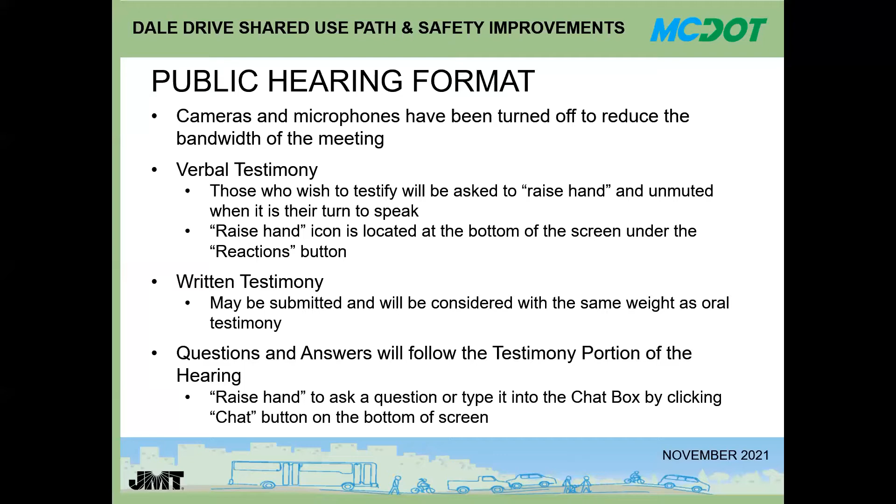Tonight's hearing is being held pursuant to Section 49-53 of the Montgomery County Code. The purpose of a public hearing is to obtain testimony regarding this project. Testimony received may influence the final design plans. Your comments should be focused entirely on the Dale Drive Shared Use Path and Safety Improvements Project, which is the topic of discussion. All interested persons are entitled to be heard at this hearing.

However, the testimony portion of this hearing is not a forum for dialogue, questions and answers, or cross-examination. Please direct your remarks to the Dale Drive Shared Use Path and Safety Improvements Project that is the subject of this hearing. If comments stray into areas not related to this project, I will ask that you refocus your comments to the subject project.

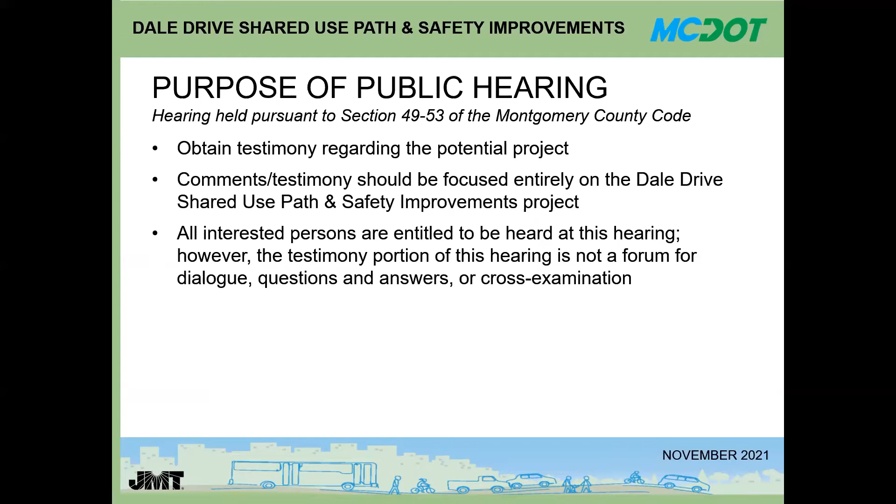Following the conclusion of this public hearing, the record will remain open for 2 weeks to allow any person who was unable to attend this hearing an opportunity to have their comments included in the public record and be fully considered. The official closing date by which all comments and testimony must be received is Wednesday, December 1, 2021 at 6:00 p.m. Submissions should be emailed to Angel Chang at angel.chang@montgomerycountymd.gov or provided via the online comment form on the project webpage. The comments must be received by the close of the hearing record.

After the hearing is concluded and the record is officially closed, I, as the hearing officer, will review and weigh all the information submitted into the public record and make a recommendation to the Director of the Department of Transportation, Mr. Christopher Conklin, for his final decision as to whether the project has been shown to be in the best public interest and whether or not to authorize the project as proposed or any portions thereof. And now, to discuss the shared use path proposal for Dale Drive, I give you Dan Sheridan.

Dan? Good evening, Mr. Paylor, ladies and gentlemen. For the record, I'm Dan Sheridan with Montgomery County Department of Transportation in the Division of Transportation Engineering, and I'm substituting in tonight for Tim Cupples, who is the Division Chief.

The subject of this evening's public hearing is to consider a proposal to construct an 8-foot wide shared use path with a minimum 5-foot wide grass buffer along the following roadways in Silver Spring: the north side of Dale Drive from Georgia Avenue to Colesville Road, and the south side of Dale Drive from Columbia Boulevard to Woodland Drive. For your convenience, we have posted a few downloadable displays that aid in the visual description of this project on the project website. We will review them as I describe the project.

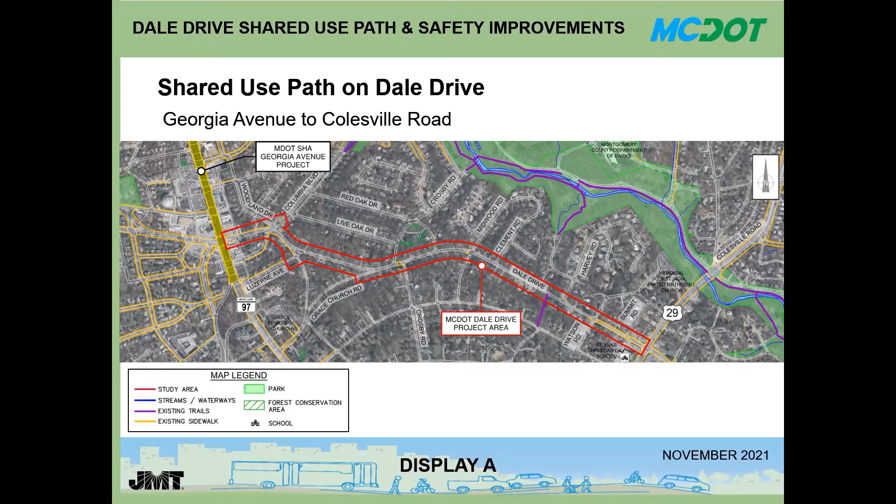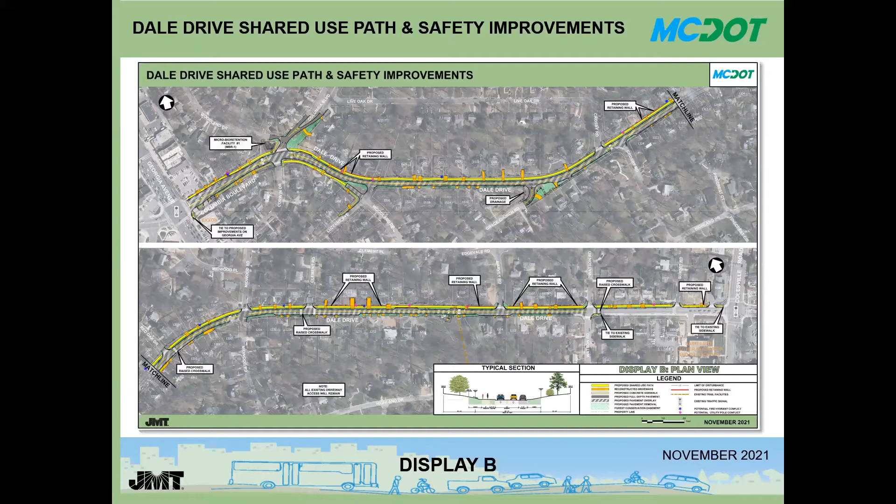Display B shows the improvements in more detail. The large plan shown on the screen can be downloaded for review. For tonight's virtual presentation, we will use zoomed in images of the plan as I highlight several of the key features. The next several slides will show the Dale Drive shared use path in more detail. Each of these slides includes a map in the upper left corner that shows what segment of the path we are discussing. In the upper right corner of the slide is the legend highlighting what the various colors and line styles are showing. The proposed shared use path is shown on the plan in yellow.

The dark black line around the path that says LOD represents the limits of disturbance. This is the area that is expected to be impacted during construction. The limit of disturbance includes the path, the grading, and the space needed to be able to construct. The orange line represents the portion of a driveway that is proposed to be reconstructed. The red line indicates the location of the proposed retaining wall. Finally, the green shaded areas represent the grass buffer and green spaces.

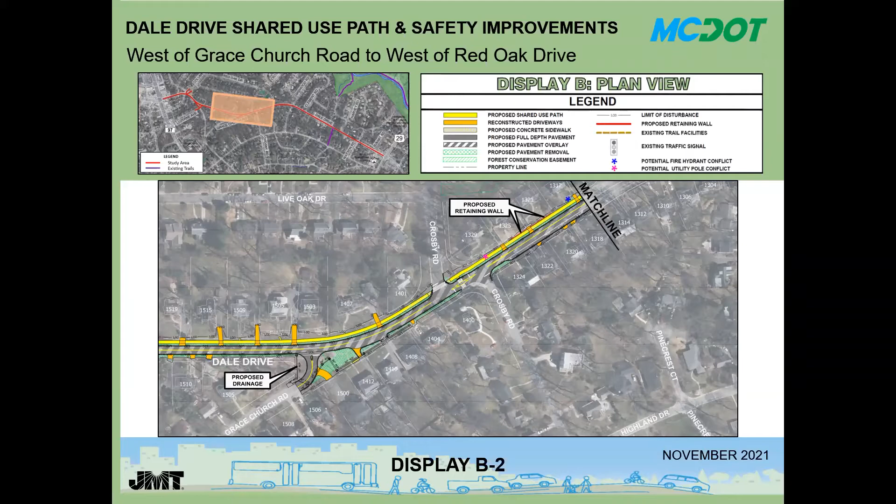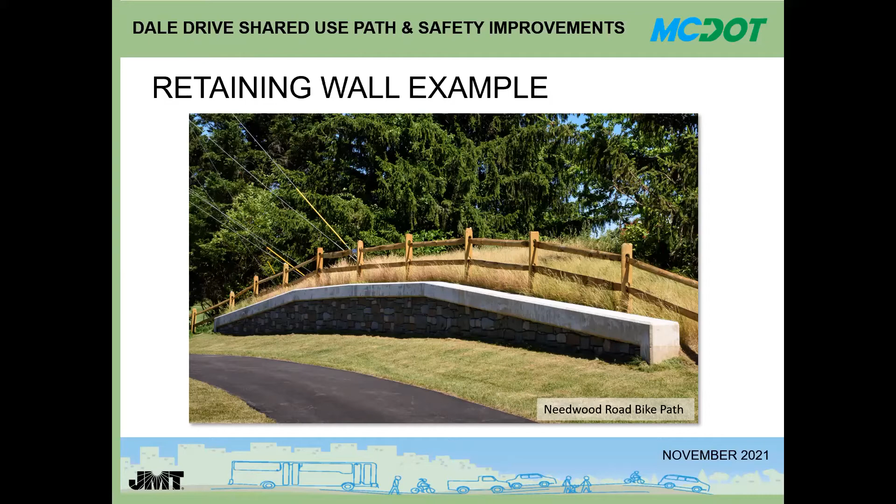Retaining wall example. This slide shows an example of the proposed retaining wall from a recent shared use path project constructed on Needwood Road. A similar design and style will be considered for Dale Drive.

Cost and assessments. The total cost of this project is currently estimated at $10,215,000, including engineering, land acquisition, site improvement, utilities relocation, and construction. There are no properties which are considered to be specially benefited by the proposed improvement. Therefore, no properties are expected to be assessed.

Exhibits. As previously discussed, several exhibits are incorporated into the public record binder for your information and consideration. The exhibits include: 1, Office of Management and Budget, Dale Drive Shared Use Path and Safety Improvement, Capital Improvement Project number P502109. 2, Dale Drive Shared Use Path and Safety Improvements 70% Design Plans. 3, Written testimony regarding the Dale Drive Shared Use Path and Safety Improvement proposal provided prior to this hearing.

4, Washington Times newspaper and online advertisement proof, Montgomery County News release dated November 3, 2021, and Go Montgomery newsletter, all advertising this hearing. 5, List of attendees to be added following this hearing. 6, Hearing transcript, also to be added following this hearing.

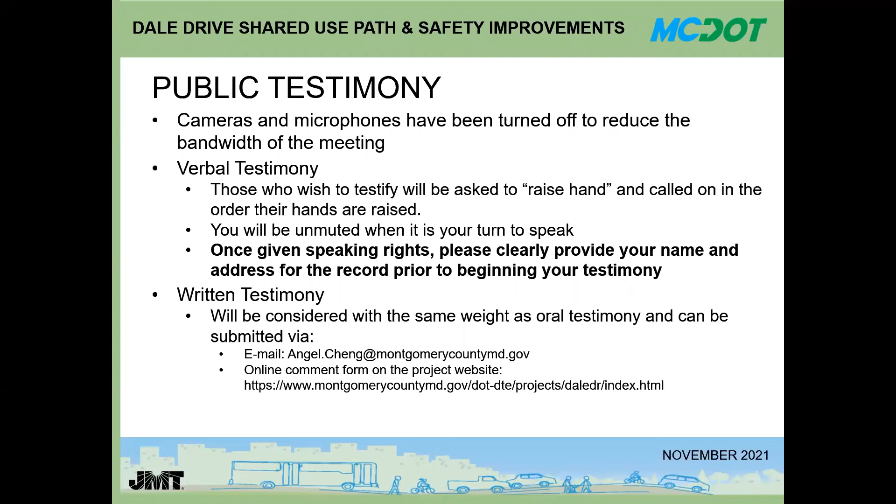Okay. So again, I appreciate and we appreciate from the Department of Transportation all of the testimony. We thank you for that. And seeing that everyone who wishes to speak has had an opportunity to do so, this concludes the oral testimony portion of this public hearing. And so now we will move into the question and answer session.

So again, the rules are similar. If you'd like to submit a question, please click the icon to raise your hand. And if you haven't done so already, you are also welcome to type your question into the chat box. Okay, first up, we have Linda Williams.

Hi, as I stated, this is Linda Williams, 1605 Dale Drive. And as I stated earlier, I guess it was July or so, you all came through and did some surveying of my property along with 1603 and 1601, I think to perk the dirt or something. But I've been wanting to know how this is going to impact my property.

I spoke to someone some time ago, because I was planning to put in a retaining wall, and if you're going to come behind and remove my retaining wall and put up this other wall, you know, it's just going to be a mess. And so I'm just trying to figure out how this is going to impact my property. Thank you. Thanks, Linda.

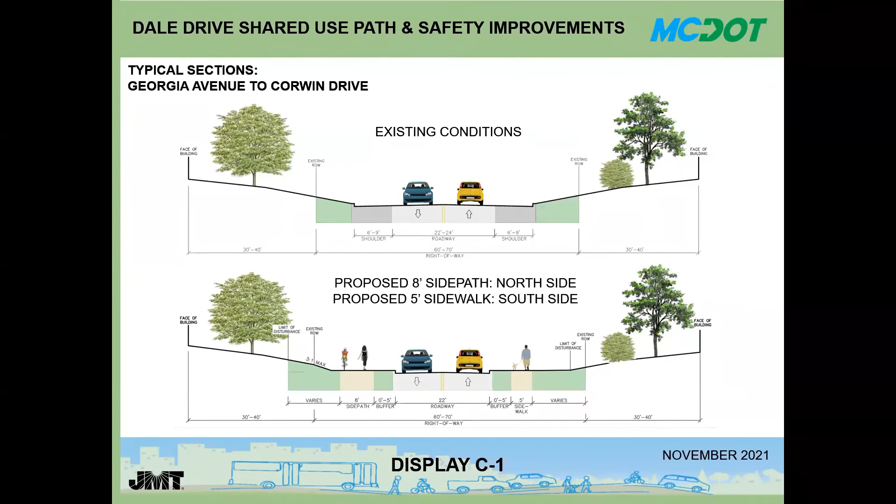If we could go back to those slides maybe to look at, but this is an area where there is a proposed retaining wall as part of the project that would be on the back side of the proposed shared use path. So the soil testing was done for geotechnical properties of the soil to build a retaining wall there. Correct. So I think we can maybe have an offline meeting with Linda Williams to go over the specific impacts to her property. Would that be helpful?

Yes, that would be helpful. Yes, very much so. So I'm going to suggest that you reach out to Angel Cheng and set up a meeting, if that's convenient to you, where we can either meet you in the field, show you exactly what's going to happen, or we can do it over the computer too, if you prefer that. I prefer probably in the field,

and I would probably like to speak with my neighbors because I'm sure they're interested too in how this is going to impact their property. Yeah, so we can do that. Okay. All right. Thank you. Okay, next we have a question from Carla and Les Holt.

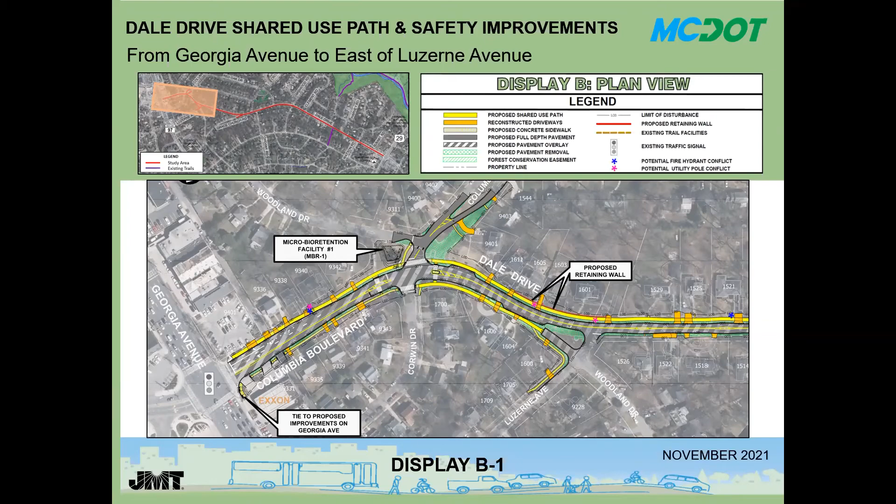Okay, so this is Carla Holt. I'm not sure I was reading the plans correctly, but from the testimony people were given, is it being suggested that parking areas, not exactly parking spaces, but the amount of area in front of owners' homes is being reduced on the north side of Dale? They're not going to have parking, is that correct? That was a question.

Yes, hi, this is Angel Cheng from MCDOT. Yeah, hi, Angel. Hi. So you're correct, and we showed a similar design back during the planning phase of this project, where we're utilizing a lot of those spaces for the proposed shared use path, so that we are minimizing the impact to the property in that way.

So you're minimizing the impact to the property, but, for example, we live on the south side. So will our neighbors on the north side still have room in front of their house to park cars for visitors and their own? Not along Dale Drive. And that's part of putting the curb in to narrow down the travel lane to slow people down.

Okay, so I want to raise an alarm here. That's going off in my head. If people visiting or living on the north side of Dale are now parking their cars on the south side of Dale, they have to cross Dale Drive with no crosswalks, with cars tearing up and down. When they didn't have to cross before, we're putting more pedestrians right smack in the middle of Dale Drive. Am I right?

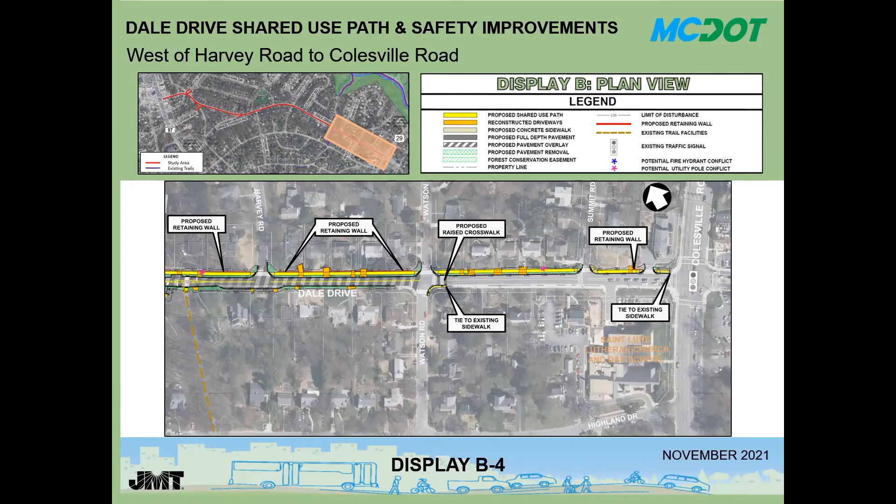Is the idea that the raised crosswalk is going to replace the existing one on the other side? Or are we going to have two crosswalks next to each other?

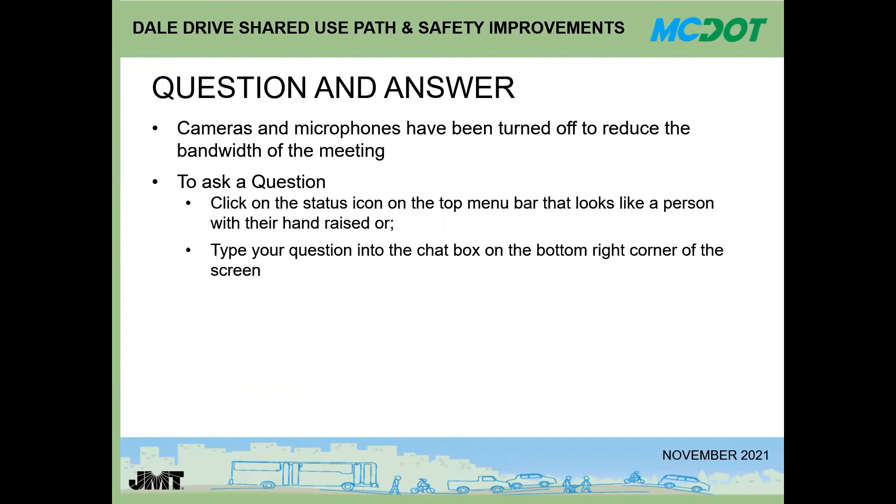Yes, so this is Angel from MCDOT again. I believe we're keeping both crosswalks, if I'm not mistaken, Amanda? That's correct. So the proposed raised crosswalk on the western leg of the intersection will be in addition to the existing crosswalk location. Okay, and then the existing crosswalk is not going to then be raised? That one is not proposed to be raised at this time, no. Okay. That seems about it. Thanks, that's all I have.

Okay, next we have Linda Williams. Okay, I'm piggybacking on what Carla said, and I'm just asking the question. First I'm going to state this. Currently, because of how busy the street is, I back into my driveway, which is relatively narrow. And if my parking out front is taken away, and I have this mumble jumble of stuff out in front of my house, it's going to make it really hard for me to back into my driveway. Then I'm going to have to pull in and then try to back out of it in the morning into this busy street, which already is very busy in the morning when I leave for work.

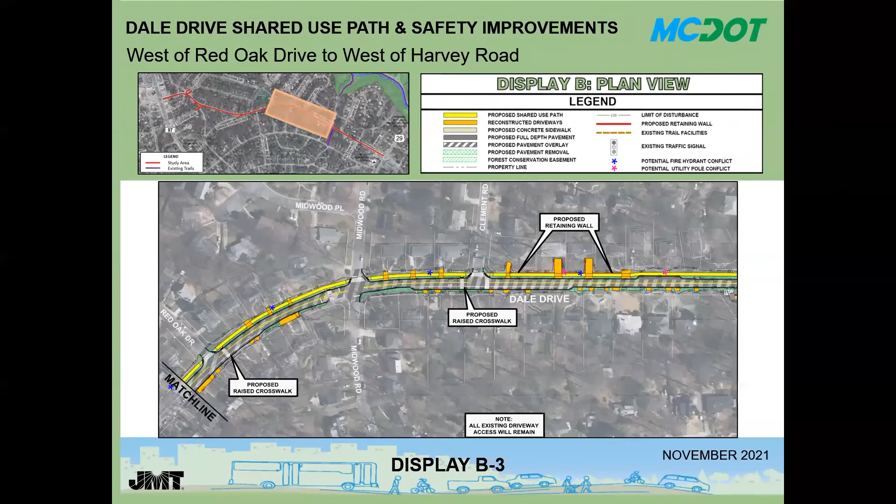Okay, next question. Are speed humps on Dale being considered to slow the traffic? So I think we just touched on that with the raised crosswalks, which act similar to a speed hump. So there are some proposed raised crosswalks to act as traffic calming in the corridor. Okay, next question. What is the deadline for submitting written comments? And I believe that's December 1st. Yes, December 1st. I think you have a slide on that, Lori. Yes, let me just move back. There we are.

Okay, let's see. Does the project envision land that is not already owned by the county at any point along Dale Drive? So for the most part, our proposed shared use path will be built within the existing county right-of-way. It might impact some of the front yards during construction, and we call those temporary construction easements. But then we will restore it back to the original condition with grass or landscaping to make sure that it looks right after the construction. But for the most part, the shared use path will be within the county right-of-way.

Okay, great. I do have a question here regarding the speed limit. I believe, Dan, you had made mention that it would be reduced to 25 miles per hour. Can Angel or Amanda confirm that? I believe that's true, 25 miles per hour. Yes, the proposed speed limit, that's the intent. Let's see. Is it possible to show an example of the proposed raised crosswalk? I think for that, if you want to email Angel Cheng directly, she can probably send you some pictures. Angel, do you have something that you could send? Yes, please email me and I'll get you a picture of it. Okay.